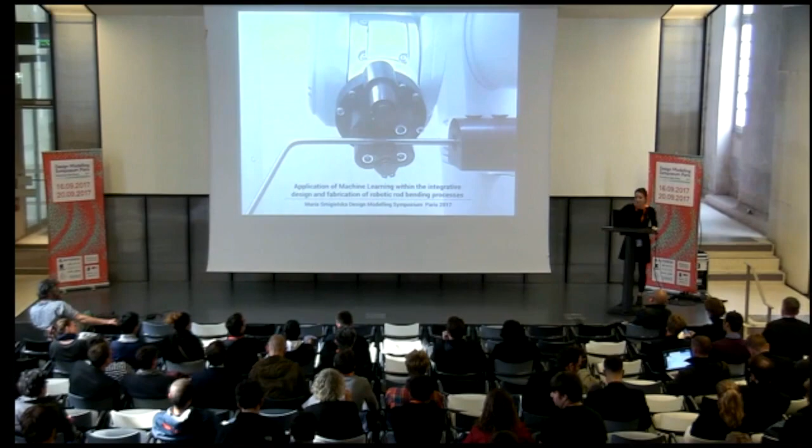My name is Smigielska. I'm an architect based in Zurich, and I will talk about the development of my independent research of robotic rod bending applied to non-standard space frames, with the use of machine learning for material control. Being more specific, I'm talking about the springback of metal in the process of bending.

To guide you through the presentation, I will start with rod bending development. Then I will go through curve deconstruction and springback analysis. I will go through two projects which were developed recently, and I will end the presentation with a summary.

Looking at the development of cold bending technology, one might notice that it didn't develop much until the 90s. It mostly used manual table benders. From the 90s, we had a big improvement of computer integration in the process, which shifted the technology from labor-intensive and hazardous process to safer, faster, and almost fully automated.

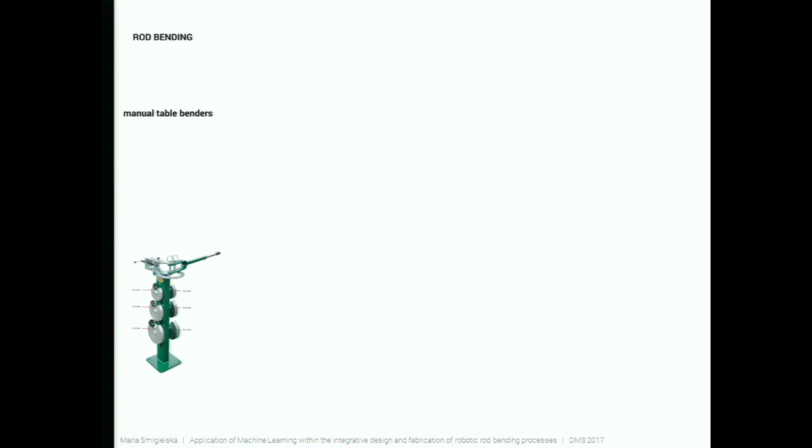Yet, it still did not integrate the material behavior, so those systems could not intelligently adapt to the conditions and the springback of the material. Springback as itself exists in all metal forming processes, whether these are rods, tubes, or metal sheets, due to its properties, compression and tension forces applied to the material.

While being bent, this process basically couldn't be automatically controlled until the year 2000.

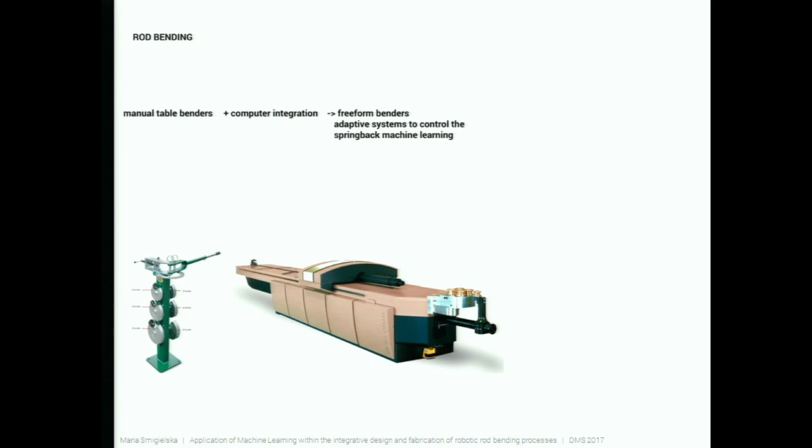So in the early 2000s, industry started to use machine learning in order to predict the springback compensation to achieve the desired bending angles. Current machines, which are freeform benders, as you can see on the slide, can do that, but access to such machines is obviously reserved only for heavy industries.

There are some precedents of employing robots for rod bending processes, like the one done by Supermanoeuvre, presented here on the photo, where the robot is used to hold and slide the rod while the bending operation is done by the external engine.

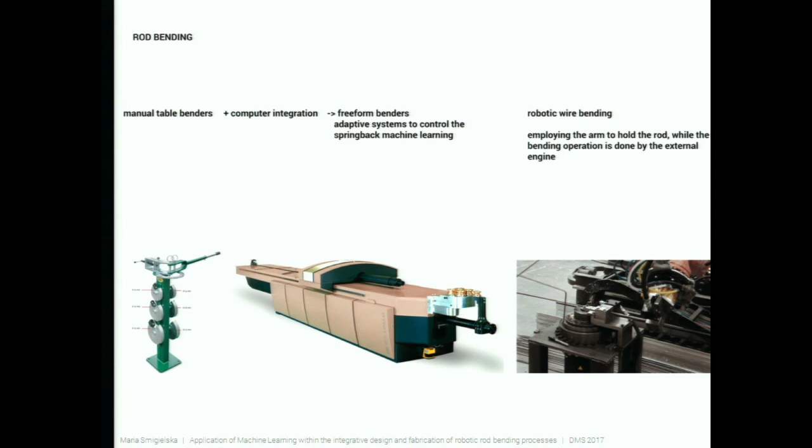In other solutions, the springback problem was solved by overbending the rod and then bending it back to the desired angle value. But in general, to summarize the situation, this is the industry that possesses the knowledge of the material and the production, keeping it beyond architects' reach, which creates obviously a gap between the design and making.

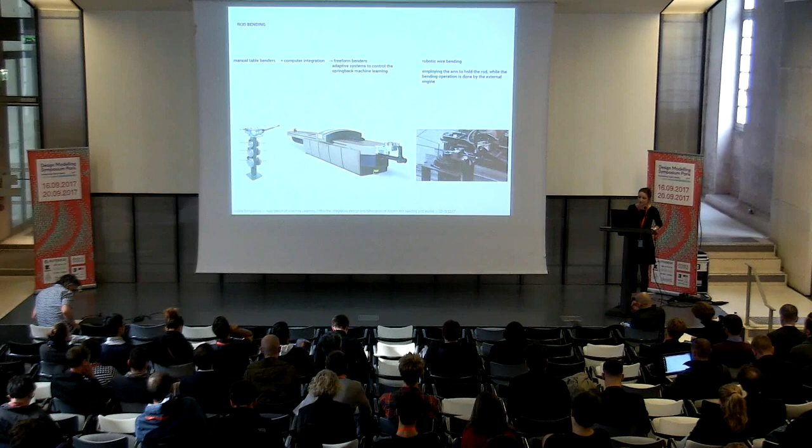This brings me to the question: can an architect, having access not only to digital fabrication tools, which we already have, but also to machine learning tools, overcome those industrial limitations, not only for simple prototyping processes, but also for complex production processes?

As an answer to those questions, I did my first trials with manual benders, with the idea that what I learned can be automated with the use of a robotic arm.

I tried with different materials, metal materials, and different joinery systems, including structural glues, welding, resin, customized 3D printed elements, and elements of hard plastic that were milled.

I have learned that the standard setup provides a static rotary station and an external gripper to keep the rod in position. But my idea was to actually simplify that process with the use of a robotic arm, which serves both as a gripper and a bender.

So what I literally did is I removed the bending element and attached it to the robotic arm. To follow that concept, two things needed to be developed.

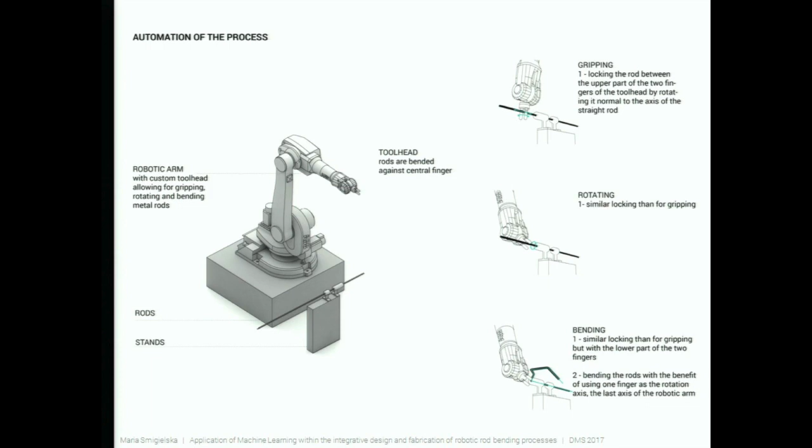First of all, there needed to be the software—instructions for the robot to grip, rotate, and bend metal rods—and the hardware, which is the tool head, that serves as a gripper and a bender. Separately, I needed a station to hold the rod.

The tool head is designed in a way that the bending happens between two bolts, as you can see on those schemes and photographs. They block and bend the rod just by rotation of the robot's sixth axis.

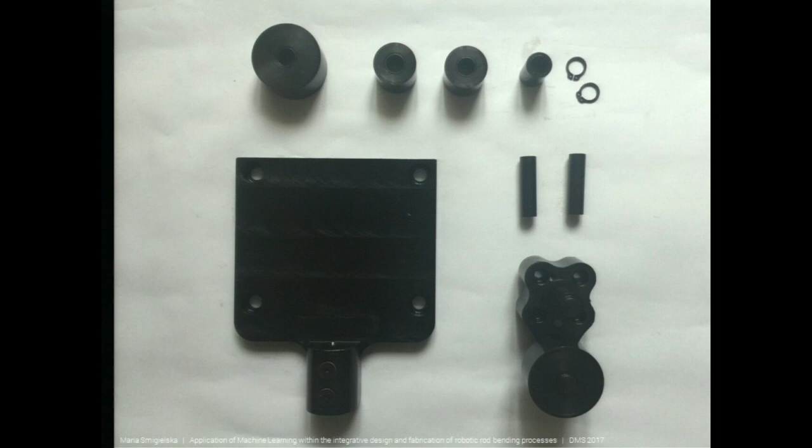I have gone through several iterations of those tools, ending up with one that allows for a certain customization of bending radii, as presented here. The holding station, the biggest black element, is designed to have different insets that can hold rods of different sizes as well.

As a next step, there was software that allows for precise curve deconstruction to be read by the robot. There are three crucial data types that we need for the robot to rebuild precisely our desired polyline curve. First of all, we need distances between consecutive bends.

We also need angles between consecutive sections of the polylines. And we also need the orientation of the bends, meaning a bend can be positive, which means we bend clockwise, or negative, which is counterclockwise, looking from the top.

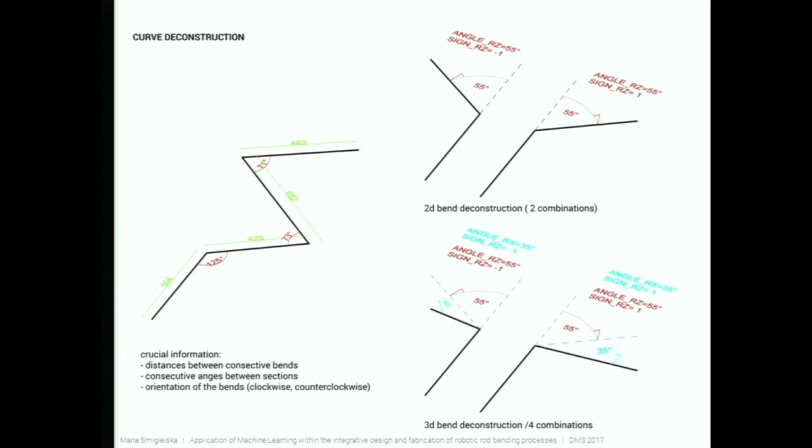It is important to mention that we need angles and orientations given twice for three-dimensional bends, as illustrated on the bottom right-hand side.

We first declare the data for the rotation around the axis of the rod, mentioned as X, and then around the Z-axis of the tool head. A two-dimensional bend can be declared the same way, very easily, just by declaring 0 degrees for the first operation.

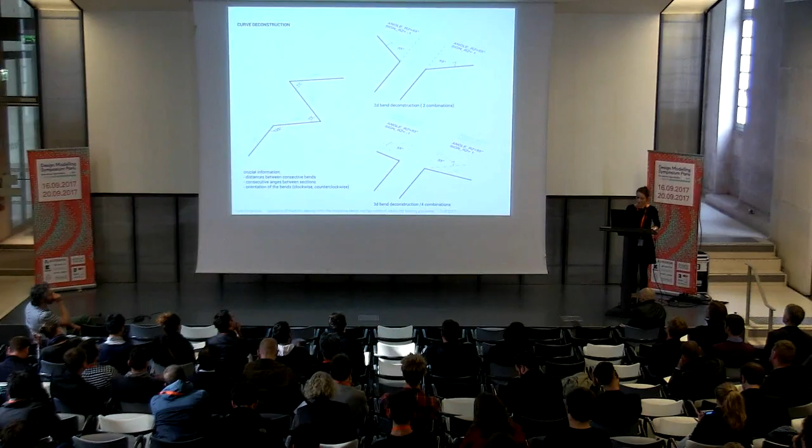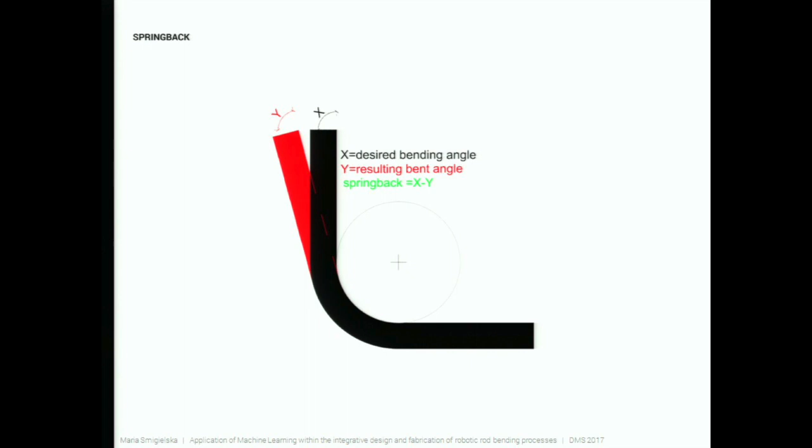Next step was to look at the problem of material behavior, springback. This is where we talk about machine learning. In order to achieve precise bends of non-repetitive angles, I needed to predict the springback in a continuous way. It was necessary to build a continuous value predictive model of the material behavior, a functional relationship between two quantities: the desired angle X and the resulting bend angle Y. Subtraction of those two results in a springback value.

So to create this predictive model, I needed to collect an exhaustive data set by making physical tests. The bending test varied between 5 degrees and 180 degrees. The measures were done with mainly two methods: manual readout, and average readouts taken from the photos.

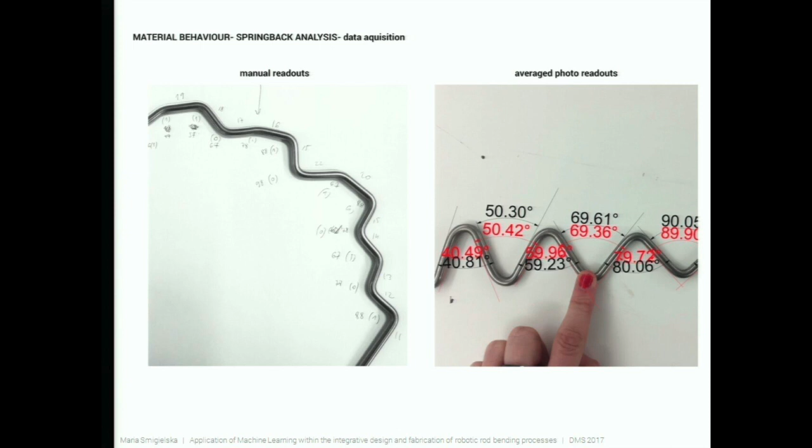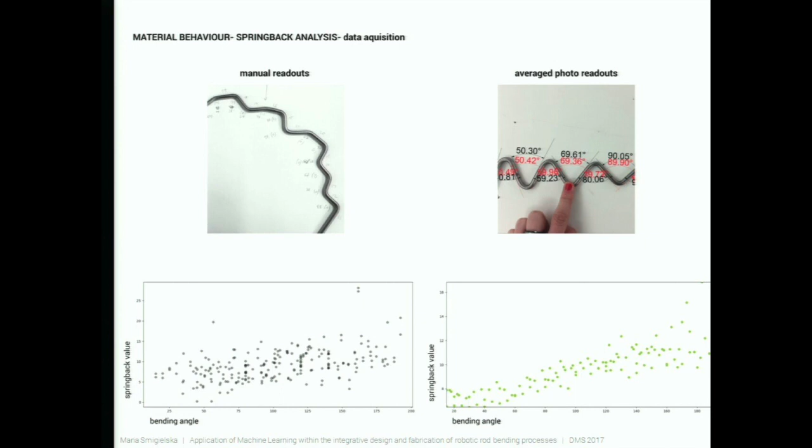If we look at the charts representing bending angles and their corresponding springback values for those two methods, we can notice that the first method, manual readouts, is very imprecise. That data is dispersed, especially for low and high angles. It's hard to extract any continuous values out of that. The average readout seems to be more consistent, and these were taken into account. This is particularly visible if we look at this chart where the values are mapped one on the other.

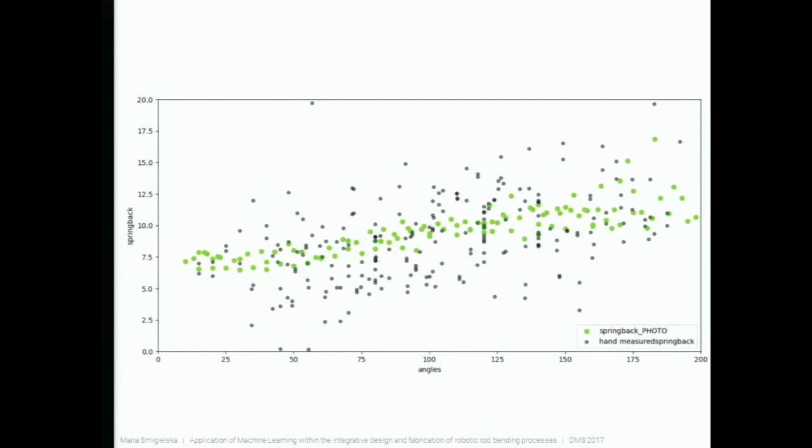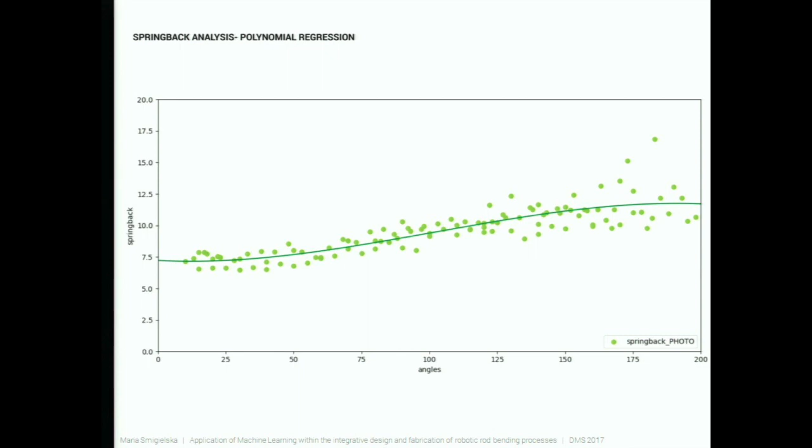After data acquisition, I came to data modeling. I used polynomial regression as a simple machine learning method. Polynomial regression tries to fit the discontinuous data into a continuous polynomial, trying different degrees of curves, which you can also have a look at here.

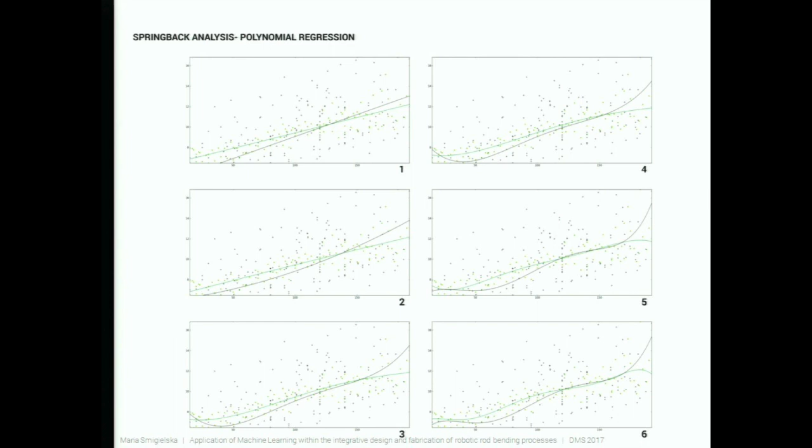We can compare different degrees of those two polynomials, represented by numbers from 1 to 6, on data sets from manual readouts, black color, and averaged readouts, which is green. It becomes obvious at some point that such a small data set, consisting of only 120 points, which was the size of my data set, required that precision be a must.

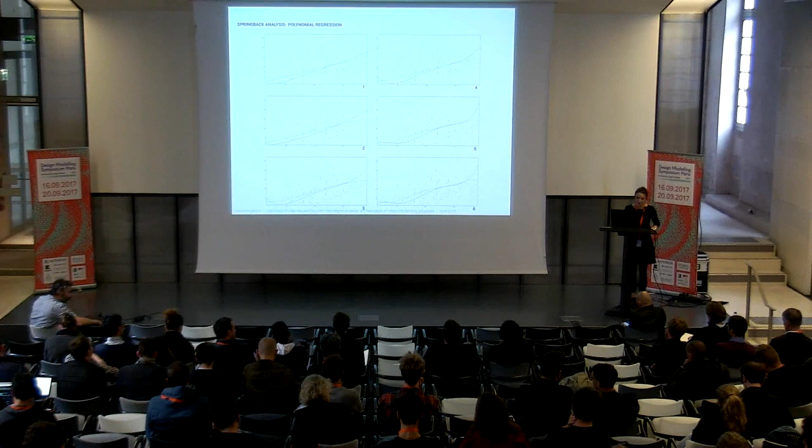So there was no discussion which method I should use, because for the project I wanted to do, an imprecision of several degrees was absolutely unacceptable.

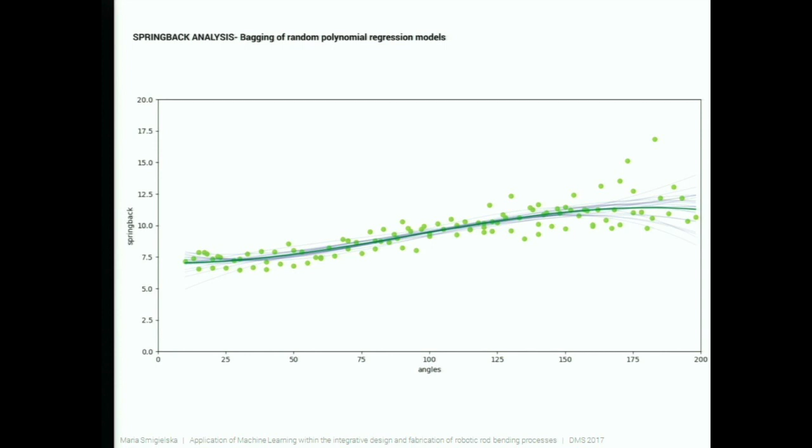Alternatively, there is another method to fit the data, called bagging of random polynomial regression, which is particularly useful for small input data sets. Bagging of polynomial regression randomly selects several sets of training data points, then generates several polynomials—these are those almost transparent lines—and then tries to average that.

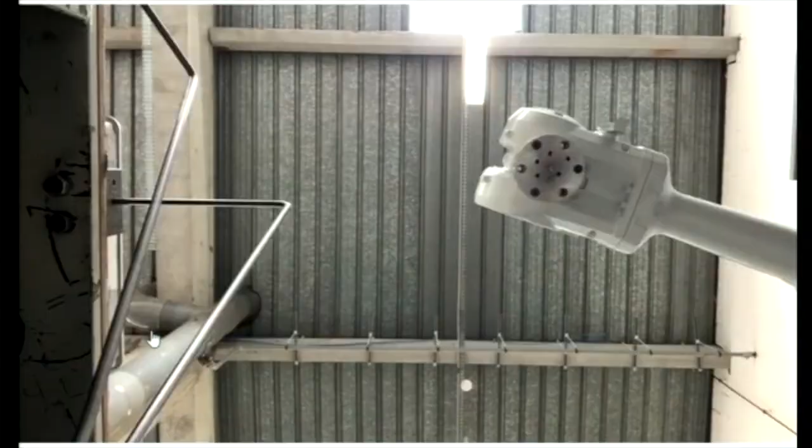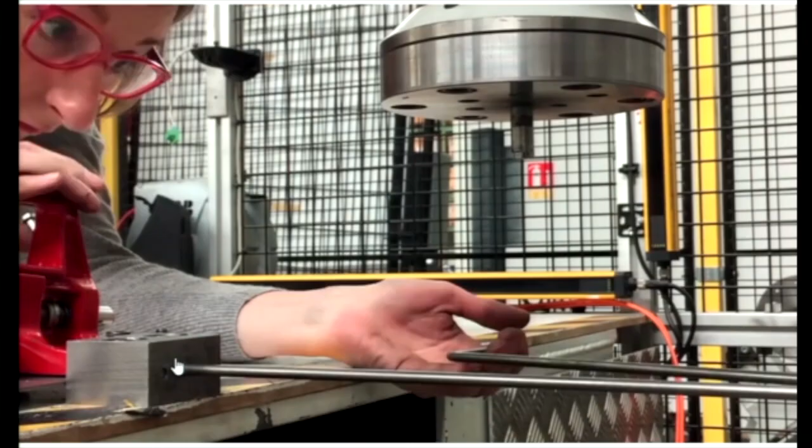The final decision was to use a polynomial regression curve of the third degree. As a result of those developments, I was capable of precisely bending any angle I wanted with a precision of plus or minus 1 degree.

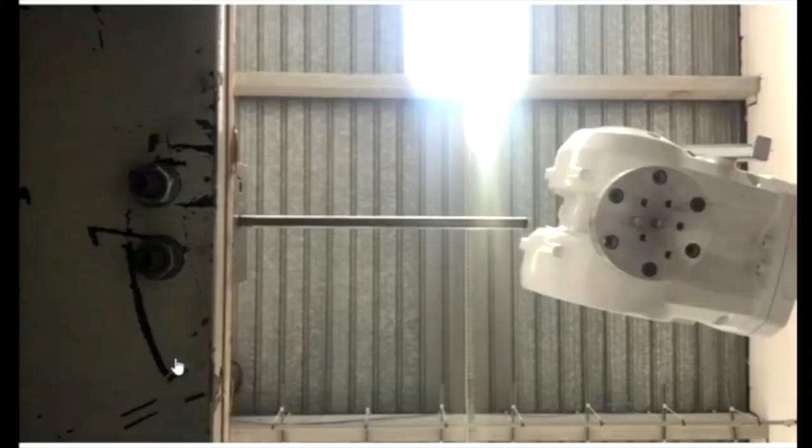Having done that, I could say that this industrialized and encapsulated process was somehow taken out of the cage with the few solutions I mentioned before: the hardware, a very simple robotic toolhead; a piece of software with simple procedures based on translation and rotation; and some data manipulations with machine learning, very basic machine learning algorithms. With such equipment, I was ready to have a look at some projects done within the technology.

What? Yes, here. So, front desk.

Front desk was a commission for AAN+1 gallery in Paris. Please feel free to visit this piece, and also a beautiful exhibition happening there right now, a solo exhibition of Arthur Mamou-Mani. The project was designed and built by me with Pierre Cutellic from the Computational Monkeys. It is an ambitious project because of its size: 5.5 meters long, and it also has a cantilevering form.

Besides the fact that the robotic rod bending technology was applied here, we also tried to utilize some data-informed design strategies, where input geometry is modified or validated by structural analysis and material constraints.

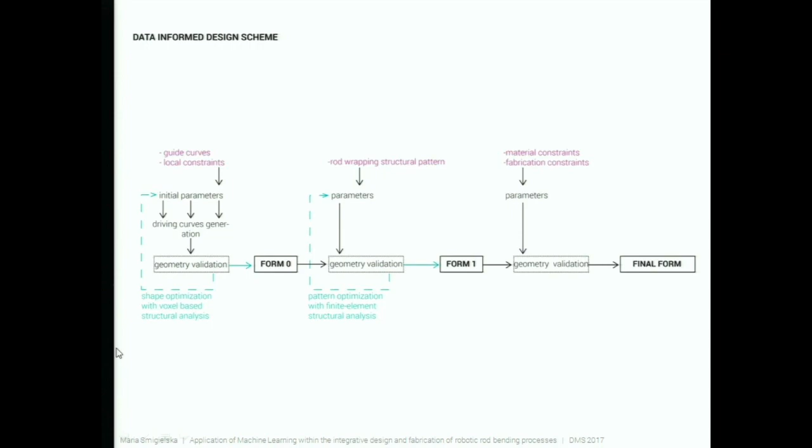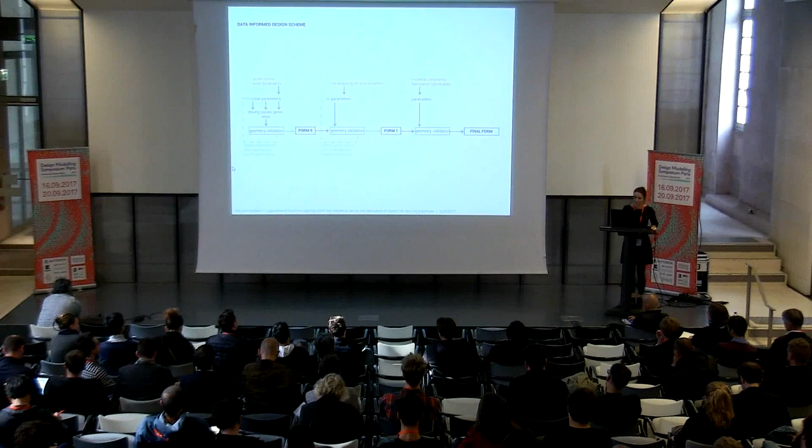To keep that short, I'll just say that the initial design started with two parametric curves, which created certain polysurfaces that were analyzed first with voxel-based structural analysis. Then we applied wire grids to analyze them with finite element structural analysis. And then we fed the model with the material constraints to provide us with the final form that we finally produced.

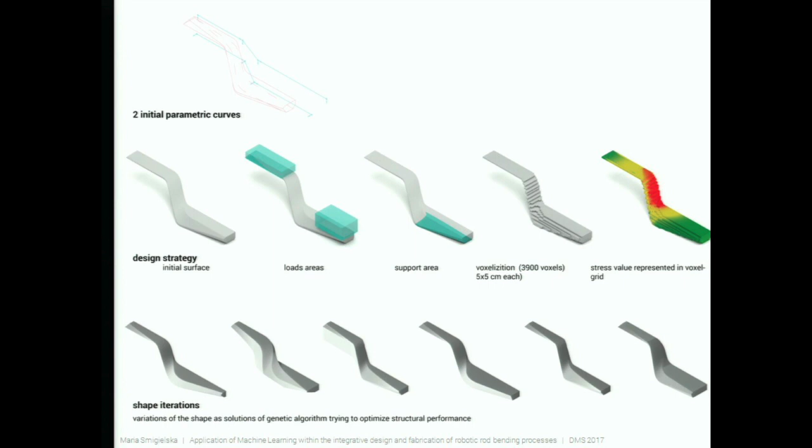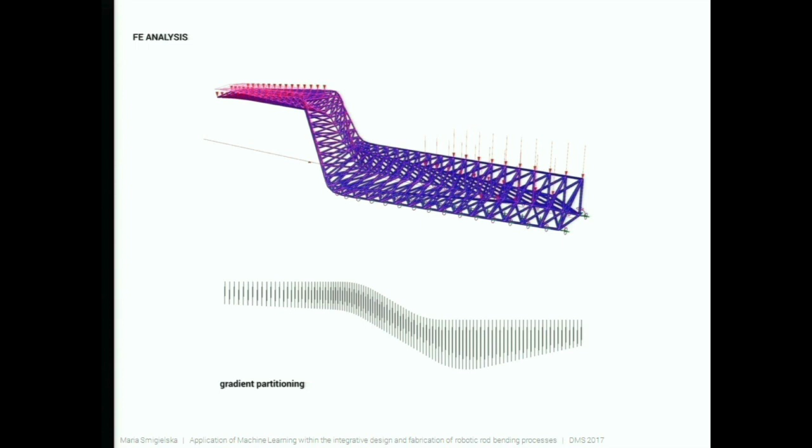As a next step, those wire grids were implemented to create a space frame that could also go through another analysis. Another genetic solver would help us, would prompt us on the right spacing for the grid. So you might notice from the top plan that the grid varies according to where the stresses are highest. We've done some mock-ups and tests.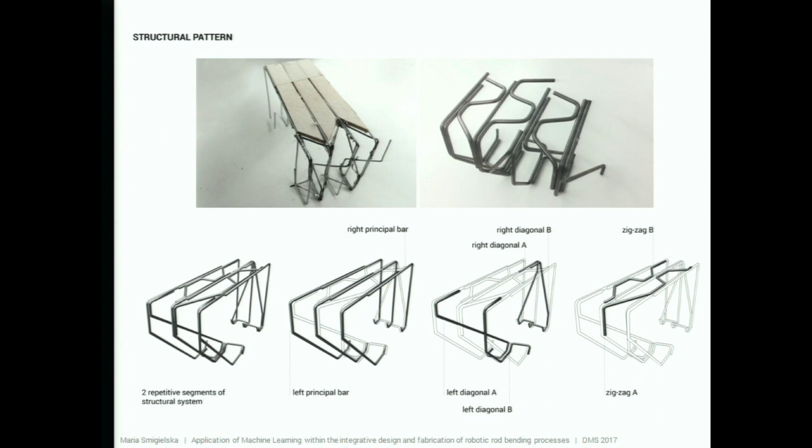Those chunks provided stiffness, and as such define the sequential pre-assembly and welding, which you can maybe quickly see in this animation. So these are the principal bars, diagonals, top zigzag, and then another chunk. In that way, we have built the front desk of length 5.5 meters.

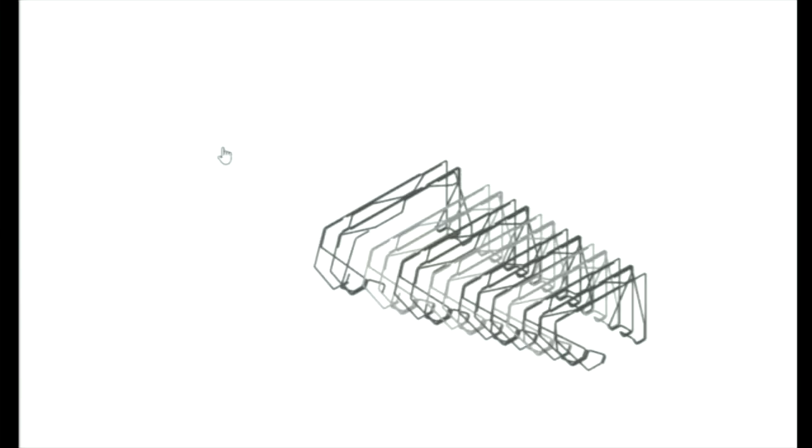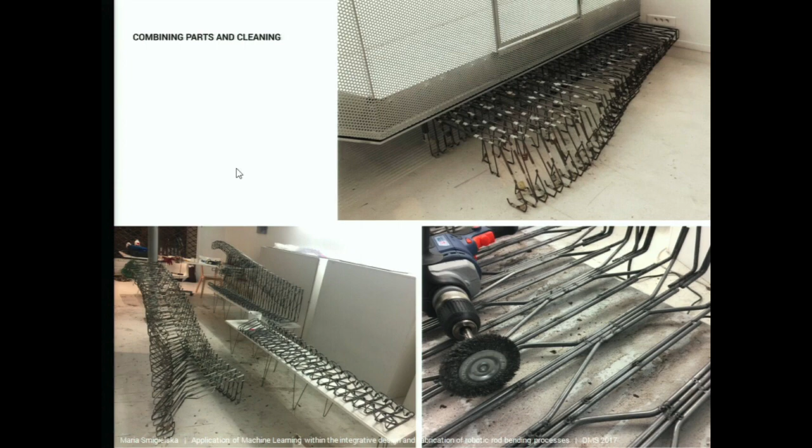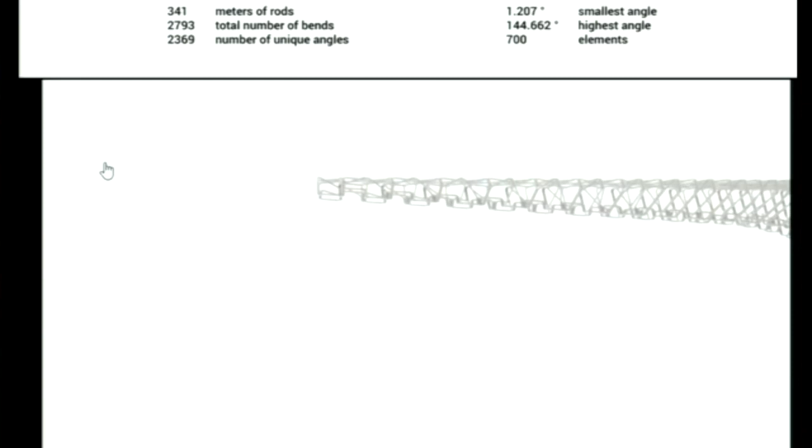This is how we look. And if we look at certain key numbers coming with this project, in total it's 700 pieces, 340 meters of rods, almost 3,000 bends, out of which 2,400 angles are unique.

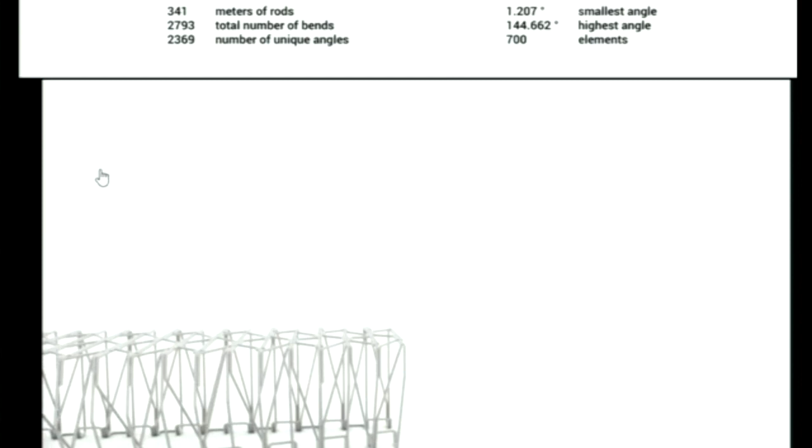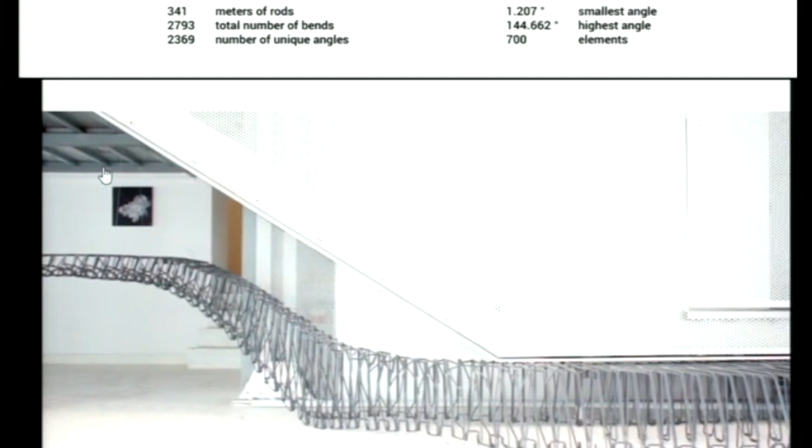As mentioned before, the assembly in that case was the most time-consuming part: 1 week of pre-assembly and another 4 weeks of welding. We needed to make more than 3,000 point welds, which at some point became almost like a hobby and a daily ritual. So this painful lesson led me to the next project, in which I wanted to check another joinery method.

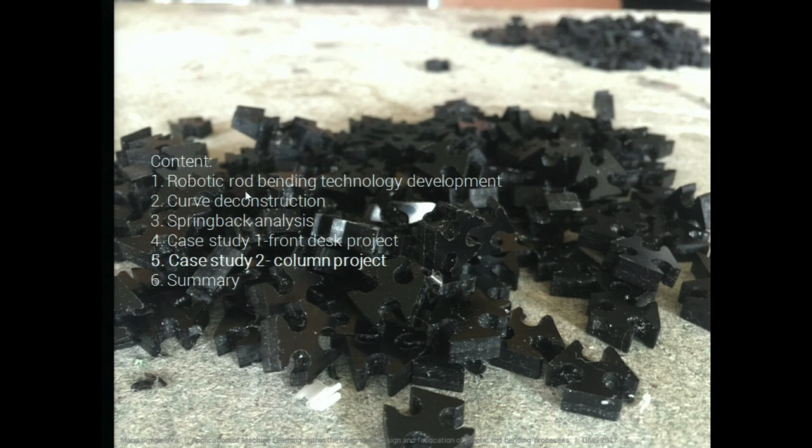Which occurred to be hard PVC, tightly fitting to the 4 millimeter rods that we used, with Mateusz Wierzycki, who will be presenting here this afternoon. We did this column. It's currently being exhibited during the Tallinn Architecture Biennale. It's 2.2 meters high, having repetitive elements based on hexagonal rotational symmetry.

So over here we have 10 unique rods of length 3 meters, which is the size of the rods provided by the manufacturer. We then divide those curves, those rods, into 3 or 4 shorter parts of maximum length 120 centimeters, and maximum 14 bends on each element.

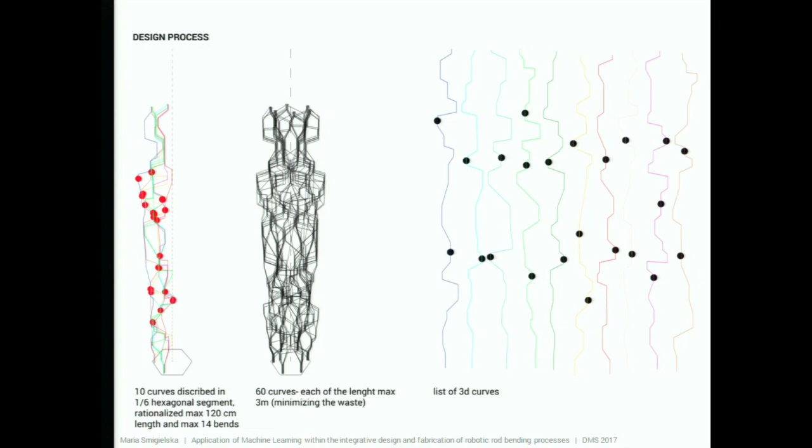The whole process of bending took 1 week for only 1 person, and only 3 days to assemble by 2 people. However complex the assembly was, the time taken was significantly reduced compared to the welding process.

As a summary, let's look at some key comparison numbers for those 2 projects. For the column, the elements themselves were more complex because all the bends we used were 3-dimensional, while for the front desk that was only 40% 3-dimensional bends. That's why it also allowed for sequential assembly.

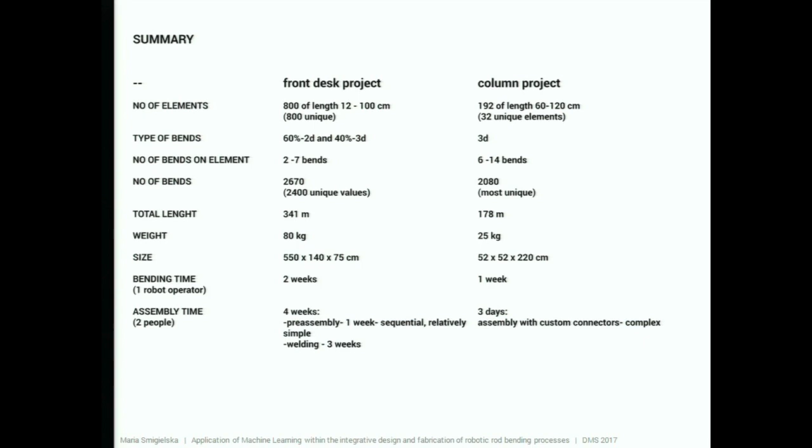But for the column, all the bends were 3-dimensional, and we increased the number of bends at each element twice, so some pieces ended up having 14 bends in one go. Very surprisingly, but also very happily, this did not significantly increase any accumulative error, which proves a certain geometric precision of this technology. Because we used 3-dimensional bends, the assembly of the parts was more complicated, but we actually traded that for repetitive elements and a repetitive assembly pattern.

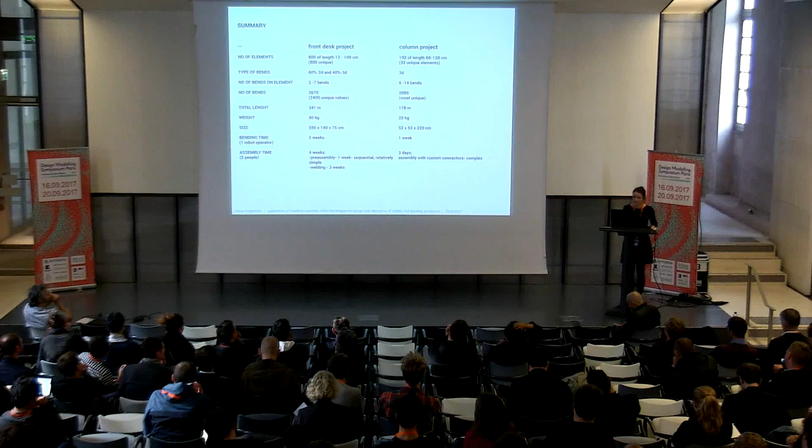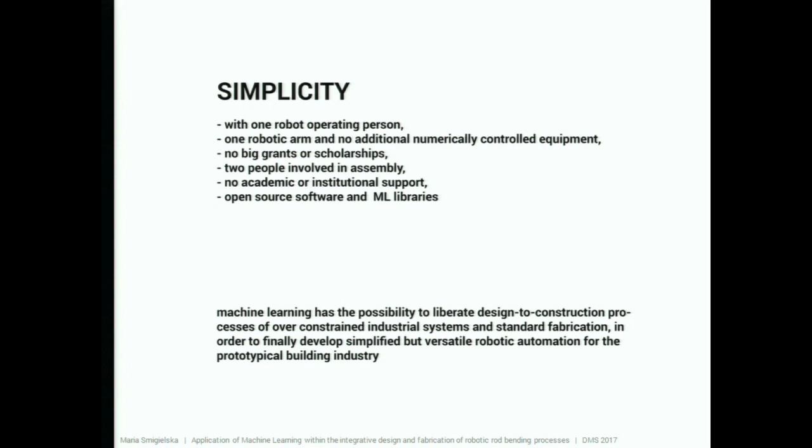Following those key numbers, I wish to underline one keyword characterizing this independent research, which is simplicity. It's important to mention that this research and these projects were pursued with 1 robot, 1 operating person, with no additional numerically controlled equipment, no financial grants or scholarships, with only 2 people assembling the pieces, with no academic or institutional support, and with open source software.

So I dare to say that this research represents a bit of a shift from the industrial setup. On one hand, we have simple mechanics and a versatile process. On the other hand, we have a simple application of machine learning that allows us to encapsulate knowledge, which so far was only available for specialists. With machine learning, it was possible to preserve certain geometric sophistication without those specialists, without industrial or academic partners.

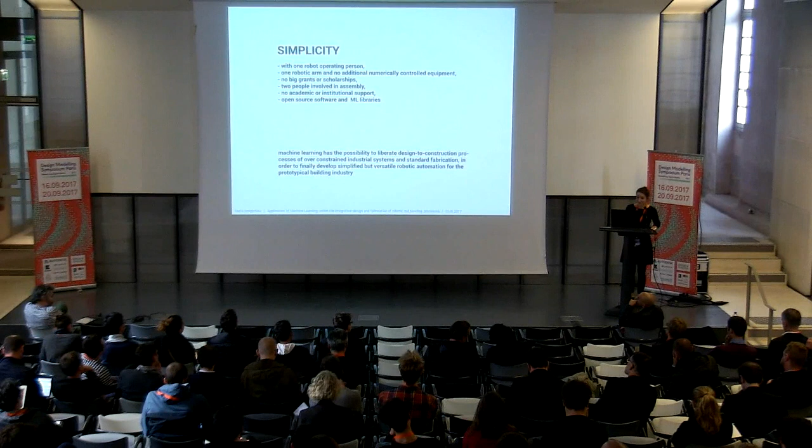But those very few partners that I have collaborated with, I wish to mention and thank now. First of all, ARIA Institute in Paris, a technological accelerator, which allowed me to use the robotic facility in Paris-Cergy, ABB Robotics. I would also like to thank Pierre Cutellic, with whom we worked on the design of the front desk project, and Mateusz Wierzycki, with whom we collaborated on the column project.

Lastly, I would like to thank the Digital Knowledge Department at Paris-Malaquais School of Architecture, where I led an intensive workshop on robotic rod bending this year in February with students, where this workshop contributed a lot to the development and verification of those processes.

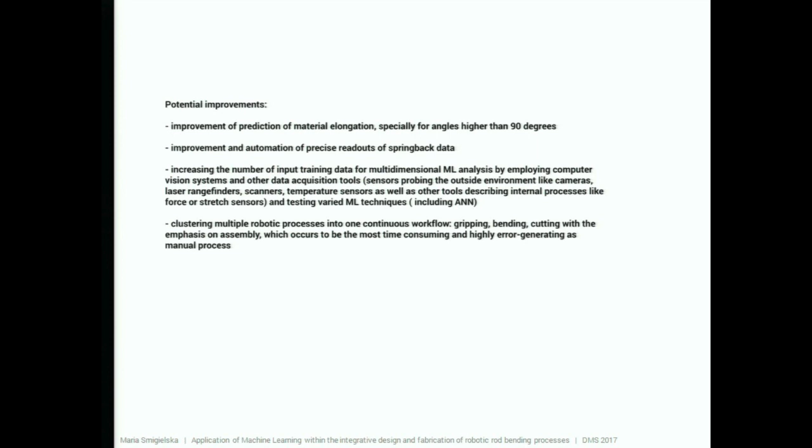I think it's also important to mention where I see the potential for improvements and developments, which one can read over here. It's mostly about material elongation, about automation of precise readouts of the spring-back data. I'm very interested in employing multidimensional machine learning analysis by increasing the number of input training data, and maybe clustering multiple robotic processes into one continuous workflow, like gripping, bending, cutting, with emphasis on assembly, which occurs to be the most time-consuming for these specific applications.